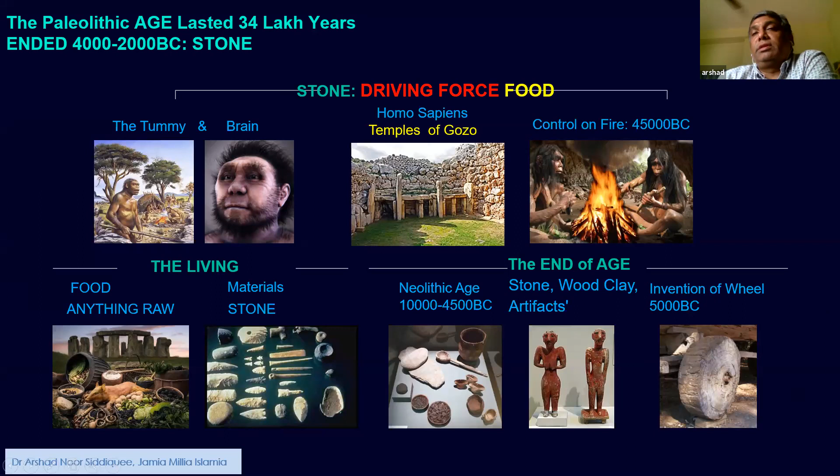Then came another revolution after the control of fire - there came another revolution, that is the wheel, which energizes the journey of development even today. This invention of the wheel dates back to 5,000 BC from now, that is 7,000 years from here.

Then came the era after the Stone Age, the first era of the Bronze Age. Because people learned that there are materials other than stone that can be developed by use of fire, they started searching for materials which could give way to metals, that is bronze, the only metal known to them.

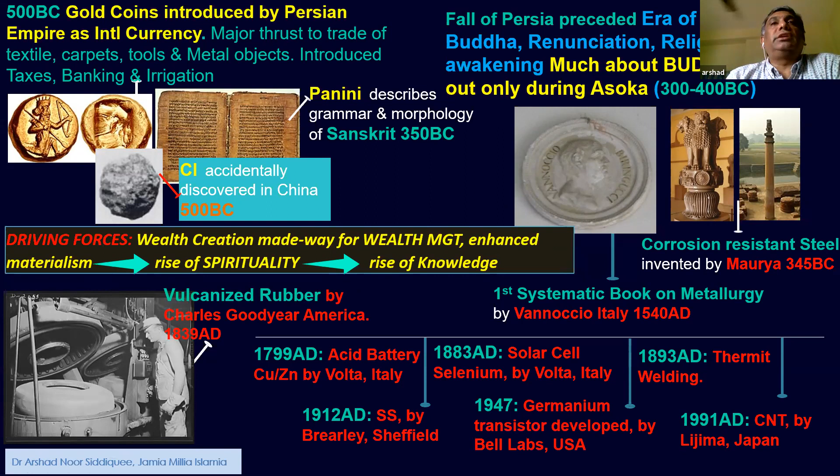Who is bigger? And the supremacy, actually, the quest for supremacy was actually the reason for the new development. What new can we do? Innovation, that's what we call it, innovation. The one who possesses the greatest knowledge will innovate better. And the very first innovation came in the form of materials.

I will show you some very interesting facts about the materials.

And because of their popularity in terms of being huge knowledge bearers, noble persons, Daedalus and Icarus were imprisoned by the empire, by the emperor. Then what did they do?

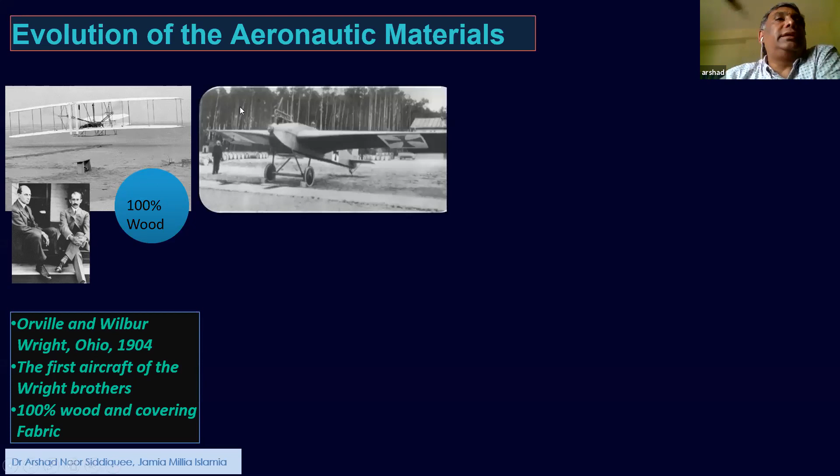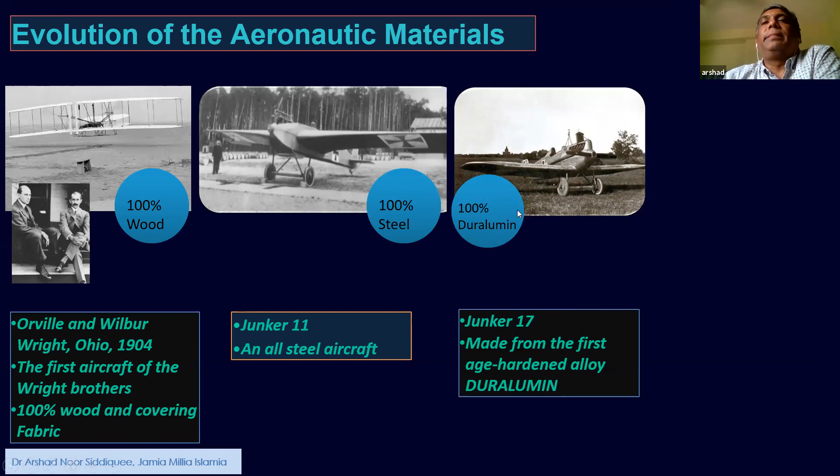Now the success of the flying object made by the Wright brothers led to a proper aircraft that was 100% steel - an all steel aircraft from Germany. Now, because steel has durability problems and weight problems, then came - by 1924 - the duralumin, the first age hardenable material. This is the all duralumin aircraft known as the Junker 17, and it is the first use of an age hardened material known as duralumin for aerospace applications.

Next is the all alloy material, 100% aluminum alloy. This is the evolution of the current day story of aircraft. So 100% aluminum alloy, different aluminum alloys, including age hardenable and non-age hardenable alloys. But as of today, for the last 10 years or so, composite material usage is increasing and aluminum usage is reducing.

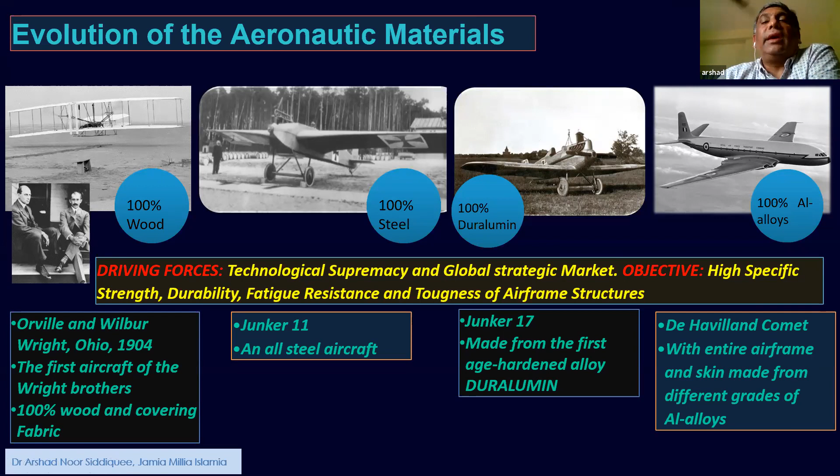Now there is a driving force: technological. We are living in the era of supremacy, and we continue to live in the era of supremacy. The driving force will always remain supremacy. This evolution actually has a reason with driving force - technological supremacy and global strategic market, wealth and technological supremacy. Objective: high specific strength, durability, fatigue resistance, and toughness of airframe structure. This is the main objective - why the material changed from wood to steel to duralumin and then to the sundry of aluminum alloys. So this is the story of aerospace, and the HEAs actually relate to aerospace.

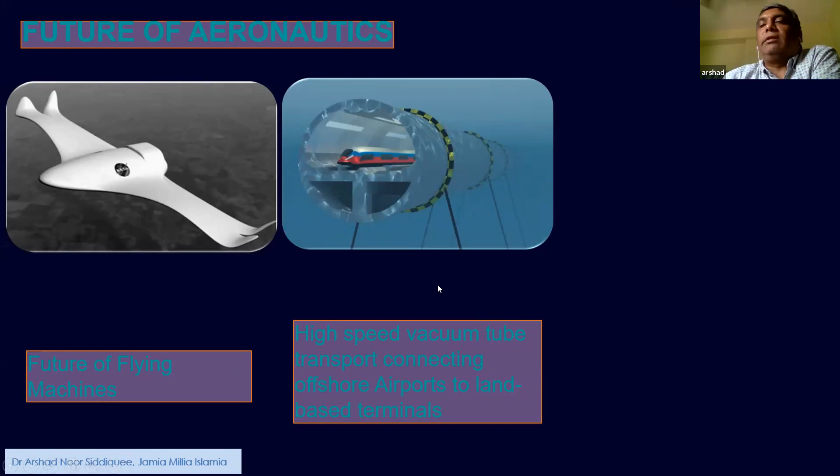Now, the future of aeronautics will look like this. The future flying machines, prototypes already tested, will look like this. Future means maybe around 10 years going forward from now, not very far. Here's what future flying machines will look like, and these are the feeder channels for the aircraft. So this is the multi-modal system: air to road, road to road, and water to road. These are all the vacuum tube transport that connects offshore airports to land-based terminals. And this actually looks like a typical airport of the future.

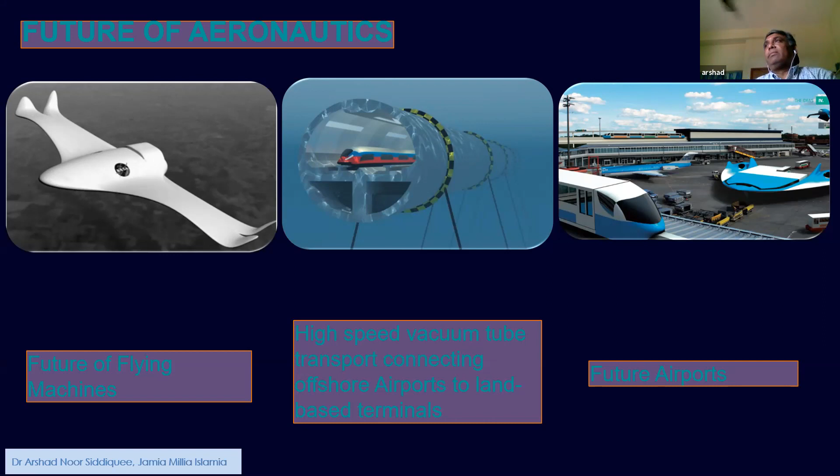Recently, China has already cordoned off 3 square kilometers of Shanghai airport, and built a maglev station with 10 lanes there. It was earlier cordoned off by the architectural structures, but now it is open. I must tell you that the maglev used to pass under a 12-lane highway, so they cast a 6-foot thick concrete roof as an underpass below the highway. This thick slab was cast at the roof of the underpass to avoid vibrations coming from the highway. This is what they are doing now.

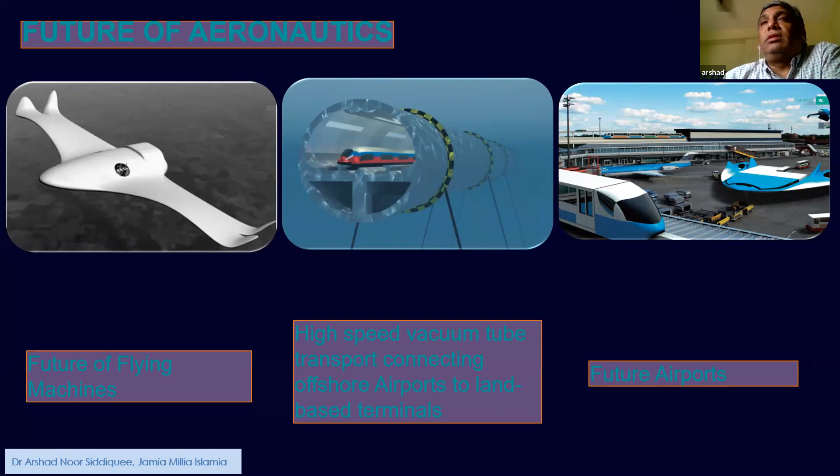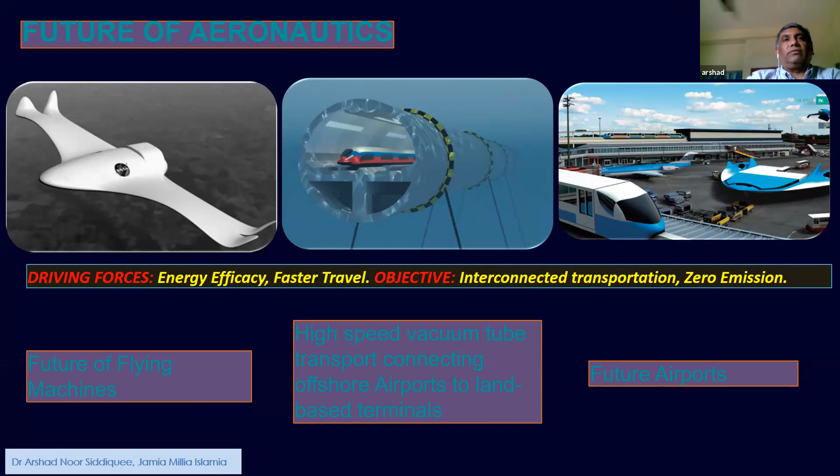So this looks like the future airport. Now, what is the driving force? Energy efficacy. The objectives have changed because we have put a lot of stress on the planet Earth. People started thinking of energy efficacy and time saving, because time is the most precious thing. The main driving forces are faster travel and energy efficacy, and the objective is interconnected transportation with zero emission.

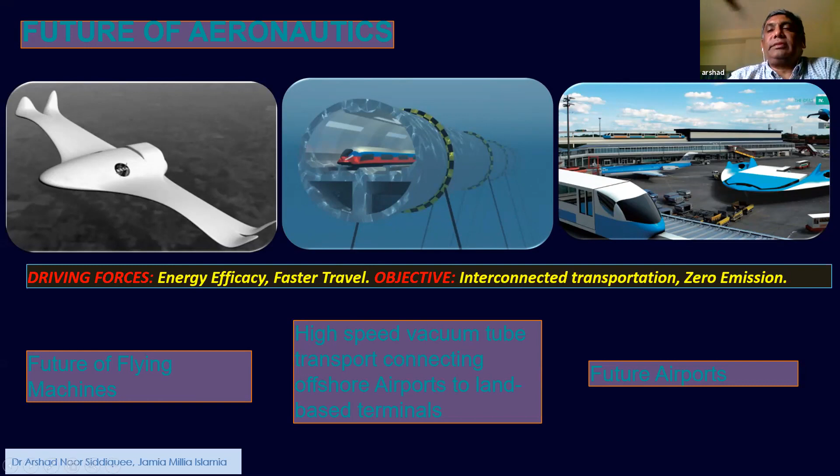These are the materials of the future. You see the rare earth materials and transition elements are going to be on the rise now - the early transition elements and the later transition elements on the periodic table. So this is the material projection for the future.

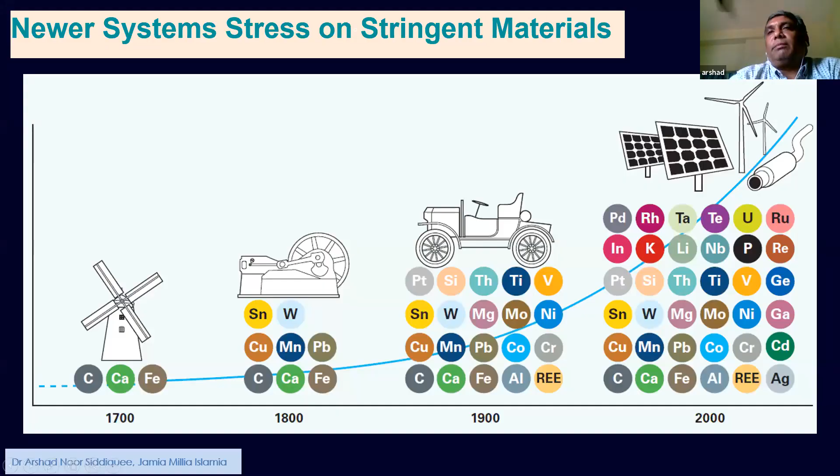The driving force for the next development will be powered by the sustainable development goals of the future, because the world body has come up with a lot of effort regarding greening the planet. They have set sustainable development goals that have to be complied with, especially by the transportation sector, because the greatest amount of material being consumed belongs to the transportation sector in terms of weight and volume.

So for reduction in CO2 emission, they have set deadlines per passenger per kilometer - a 75% reduction is the target, vis-a-vis today, 90% reduction in NOx, and noise emission reduction by 65%. Now you can see where you can actually have your own share of research. You can think of working on damping materials, damping of noise and vibrations - those in design - and those in thermal side can think of reducing NOx and COx.

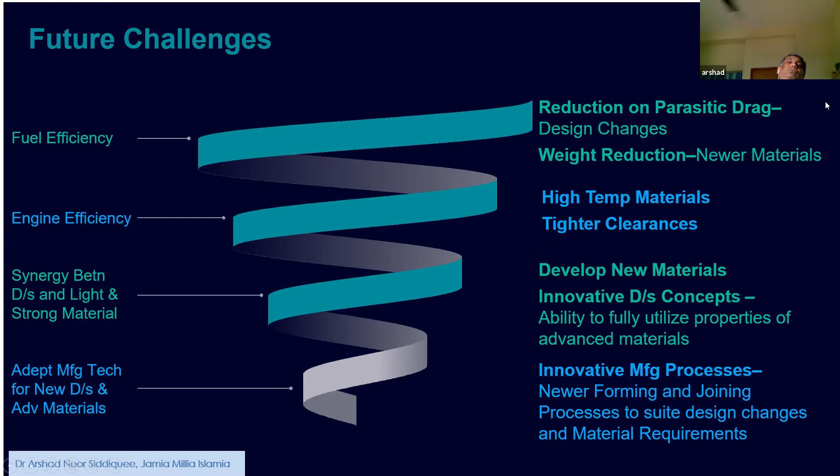Now, the main objective for the superstructure is the weight reduction, and the weight reduction actually directly relates to the specific strength of material.

Typically, the conventional strengthening comes with these aspects: refinement strengthening, dictated by Hall-Petch effect, and strengthening by cold work, which is facilitated by enhancement of dislocation density. If you look at the fully annealed material, it will have 10 to the power 8 dislocation density, and when you give it heavy cold work, it will increase the dislocation density to 10 to the power 12. So this is the order of dislocation density that changes as a result of cold work. So cold work actually enhances dislocation density, which in turn enhances the strength of material.

The first one is refinement strengthening, grain refinement, through the Hall-Petch relationship. Strengthening by cold work is through dislocation density. Then solid solution strengthening, that is resistance by lattice distortion and pinning effect. The solid solute atom that goes into the alloy will be either larger or smaller than the parent or solvent atom. If it is so small that it can be housed in the interstice, then it will be the interstitial solid solution. So in all three possible cases, the distortion in lattice will actually affect the dislocation movement, and hence it will strengthen.

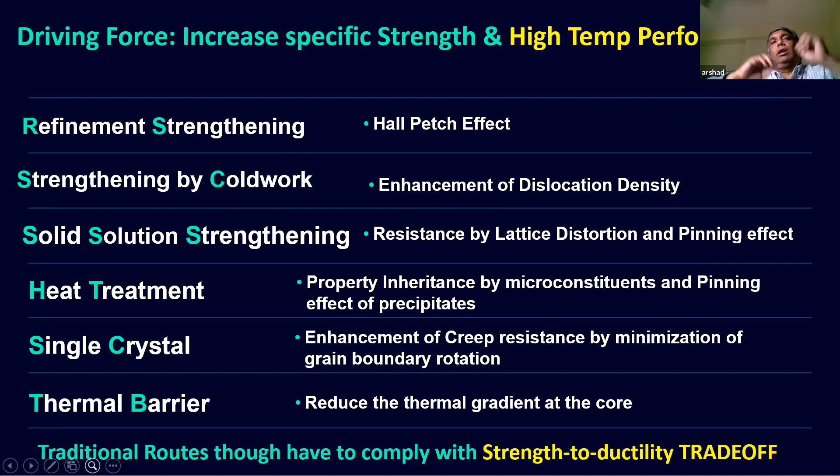But the traditional route has to comply with the strength-ductility trade-off that puts a limit beyond which we cannot go any further. So this is what I spoke about in my previous slide.

The superalloys, coupled with single crystal casting. The single crystal casting was facilitated by directional solidification. Turbine blades were cast, most commonly by investment casting, and after investment casting, directional solidification evolved into single crystal casting.

This is how Ni-based superalloys were developed from 1940 to 2010. I say 2010 because, as I told you in the beginning, the high entropy alloy is a phenomenon of the last decade, 2011 onwards. The next phase of evolution of engine materials will not come from superalloys, but from high entropy alloys.

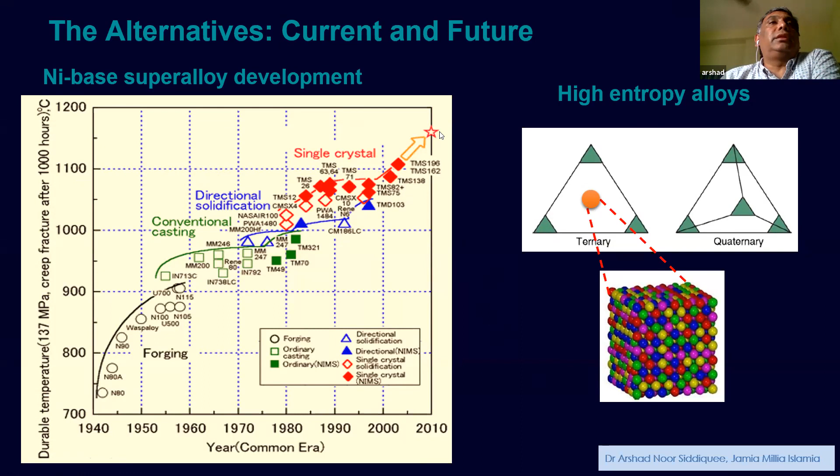What are high entropy alloys? I will come to that in the next slide. What is novel about them? I told you in the beginning that conventional alloys deal with the traditional concept of enthalpy, whereas high entropy alloys deal with the entropy of mixing.

The requirement is a minimum of 5, up to a maximum of 13 different elements known to be mixed in order to make high entropy alloys. But this 13 has no finite limit, and hence we have an infinite workspace - an infinite number of new high entropy alloys can be developed. So the space is very vast and open.

In conventional materials, there has to be a solvent and solutes. But in the case of high entropy alloys, the principal element, that is the solvent element, can be any prominent element - there is no limit. So there's high entropy of mixing, a simple solid solution phase, and lattice distortion.

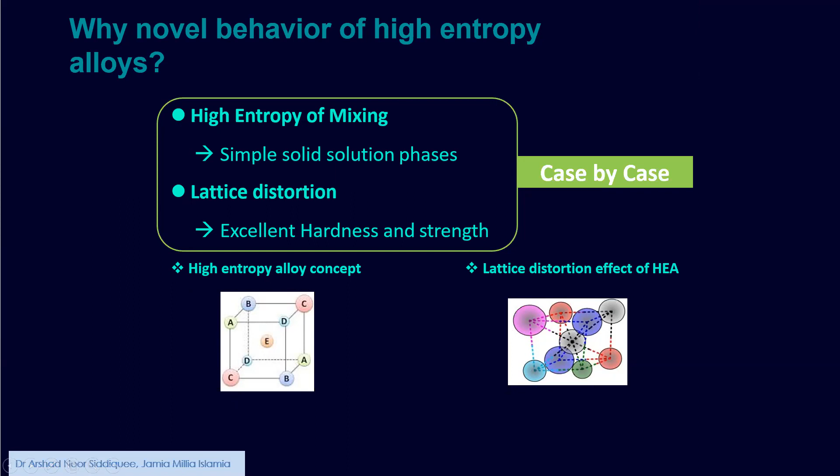Future aeronautic materials lie not only in HEAs but also in graphene. Graphene is interestingly represented in that it can actually...

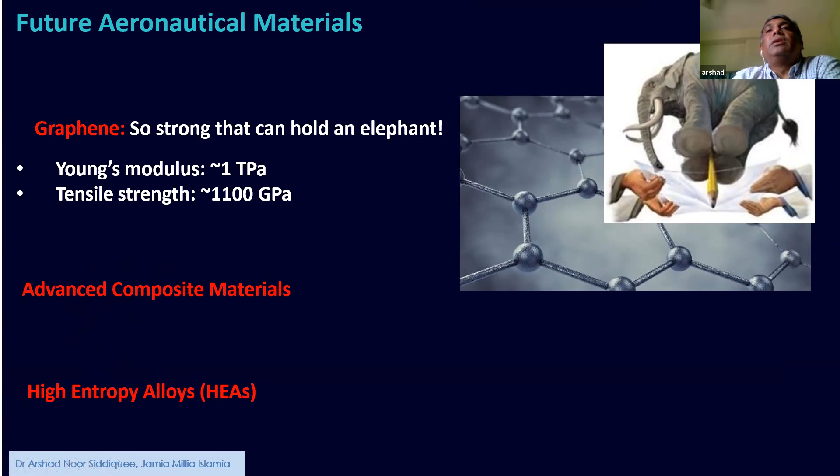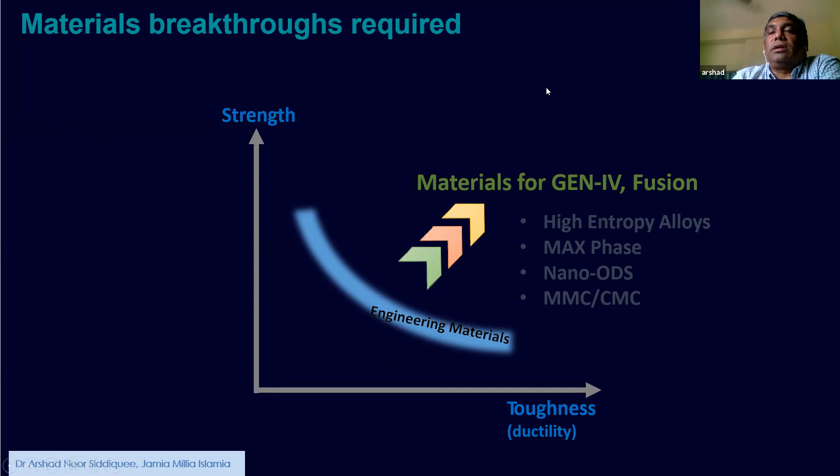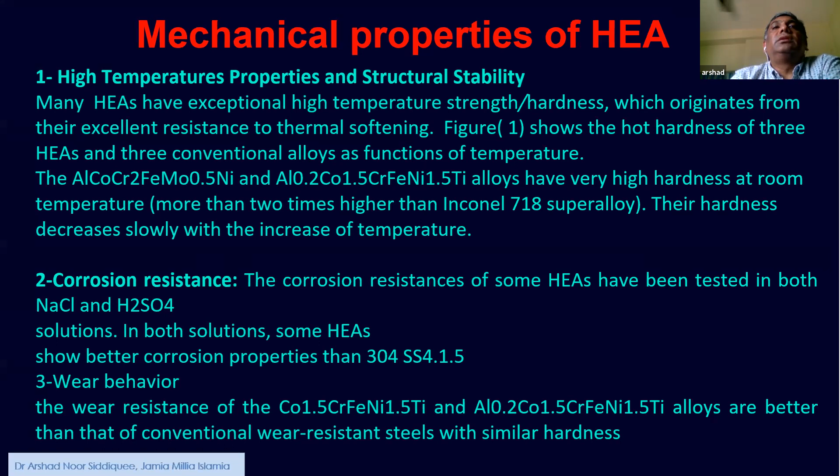So all properties simultaneously get enhanced, and the traditional trade-off between strength and other properties does not exist in case of high entropy alloys. And of course, as temperature rises, the strength and other properties of traditional materials reduce very sharply, whereas in case of the high entropy alloys, the performance remains steady.

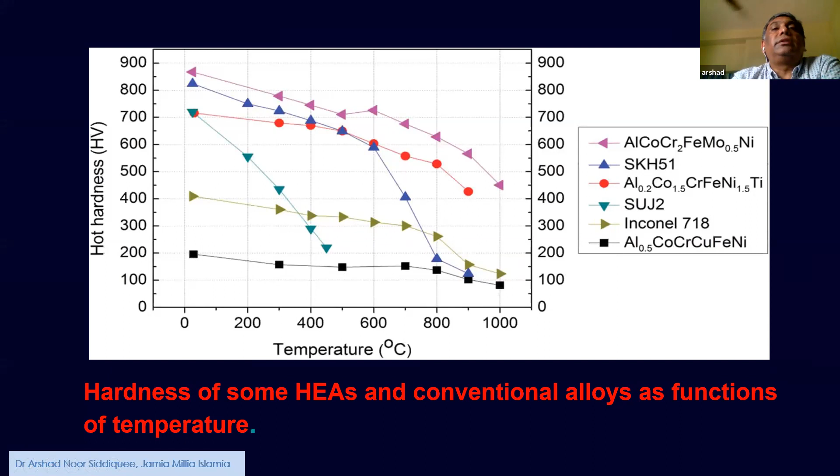You can see these are all the different types of high entropy alloys with different colors of geometric shapes, and you can see the hot hardness at temperature 1000 degrees Celsius. The material was heated and its strength was measured in hot state, and you will see that it maintains usually a steady hot strength. So this is one of the plots that depicts the relationship of hardness with temperature.

And again, this is the depiction of Young's modulus and specific strength of different high entropy alloys. This is actually reference.

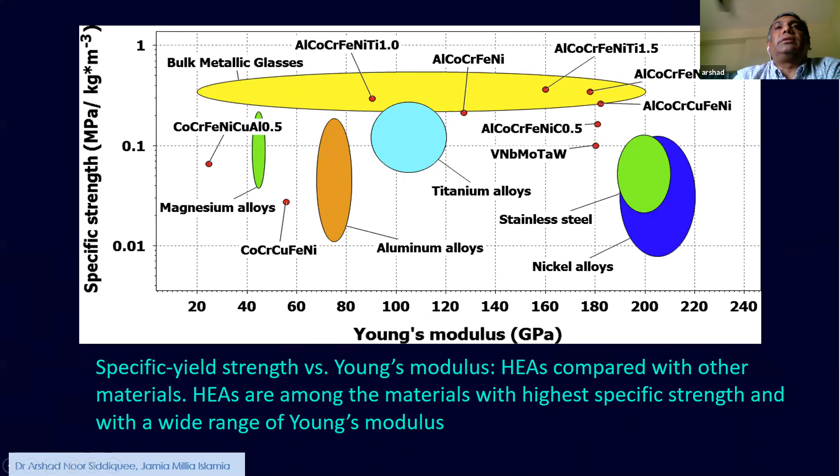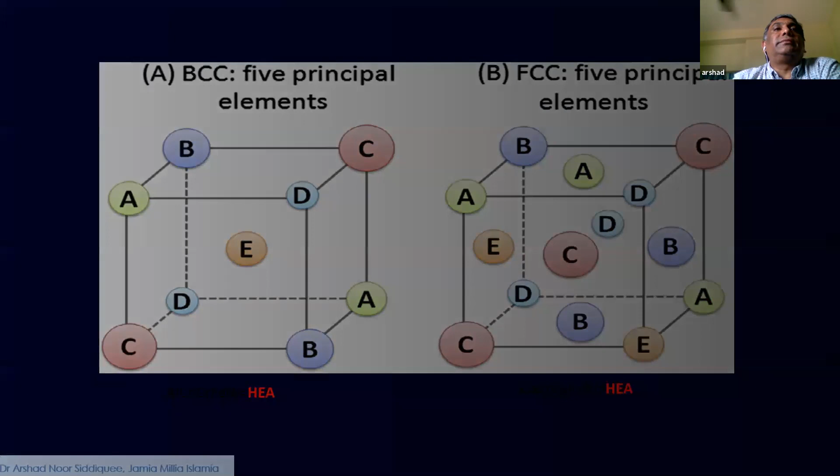So what are high entropy alloys? I think I have to skip this slide, I already showed you. High entropy alloys, you can see here, have a minimum of 4 to 5 components, and there is no limit for the maximum number of components, but minimum 4 to 5 components. The alloy can generate a uniform structure, either FCC, BCC, or HCP.

You can see the example of cobalt, chromium, copper, Fe and Ni as the main components of the HEAs, wherein this particular alloy has a FCC phase, whereas material such as Fe has a BCC phase and chromium has a BCC phase, whereas nickel and copper have FCC phase. In case of Fe, when the temperature rises beyond 912, it changes from BCC to FCC, and then again around 1400, it changes from FCC to BCC, but the basic structure remains BCC.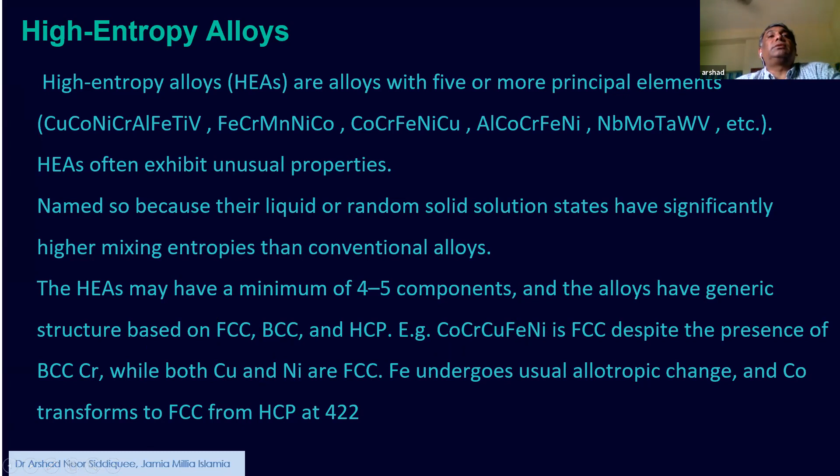So there are 3 types of HEAs: BCC HEAs, FCC HEAs, and HCP HEAs. Out of these 3 categories of HEAs, the FCC HEAs possess the highest magnitude of creep resistance. So this is what I just wish to show you - this is the structural schematic representation of atomic arrangement in unit cell.

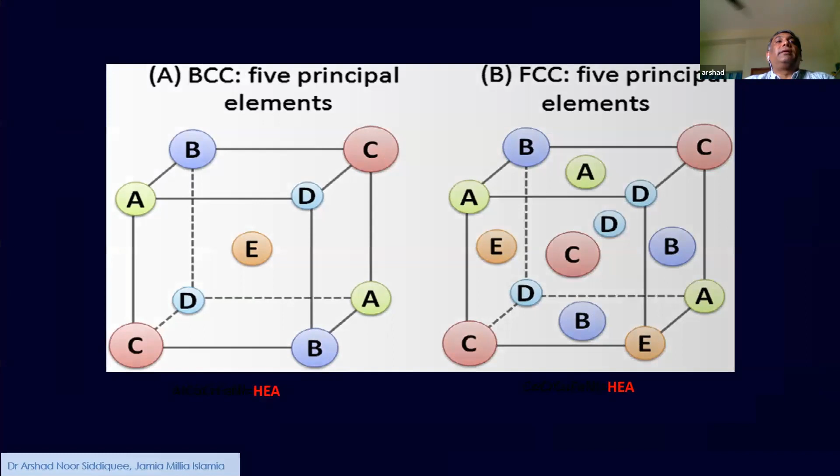Now thermodynamically, this is the classic equation which gives the free energy, wherein the enthalpy remains the major factor for conventional alloy development, whereas in case of the high entropy alloy, the delta S mix is the main factor which actually comes into play. In order for the energy to be at global minimum, we can play with the right hand side of this equation - delta H should be low and delta S should also be high.

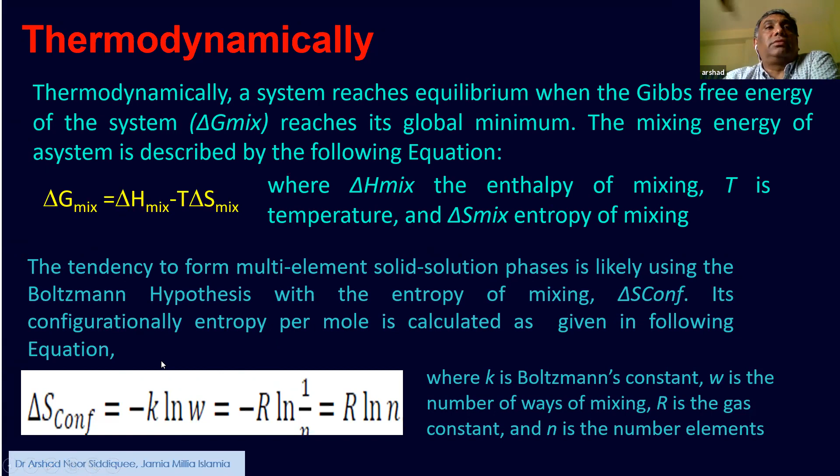So this is how we actually calculate. We can also calculate the Gibbs free energy and then identify which particular alloy is most likely to be formed. That is what we do in FSP - we actually calculate enthalpy and entropy, and then utilize this equation to calculate the fraction of which particular HEA has been formed. So this is an equation. I think the time is about to finish, already finished, so I have to stop here.

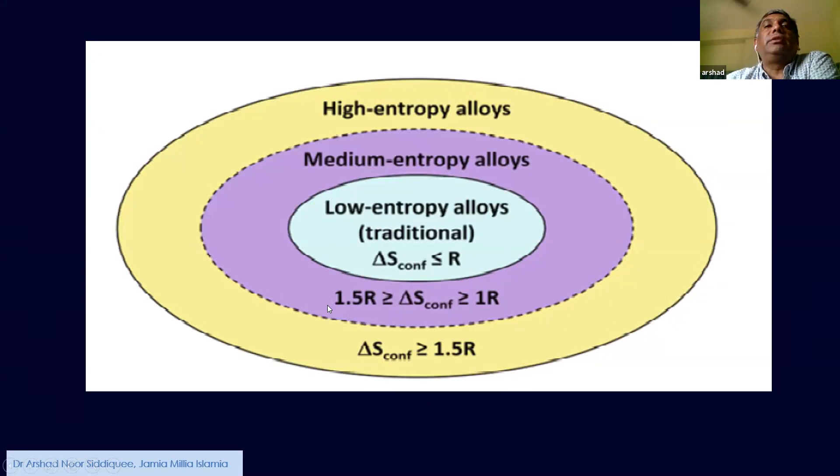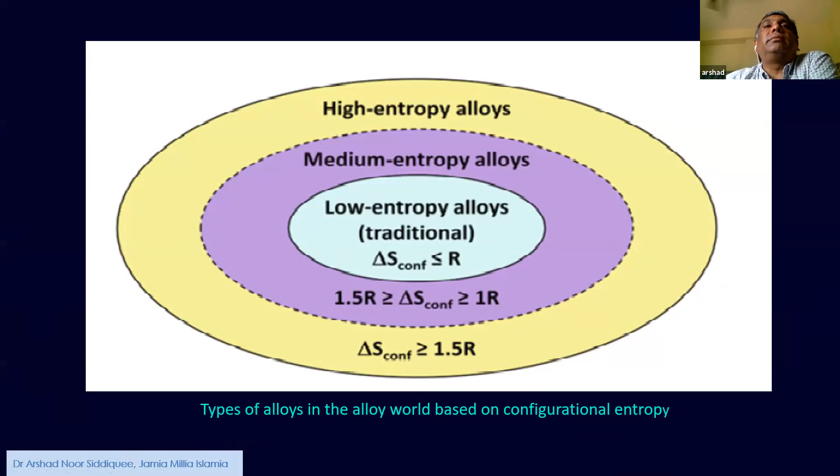There are 3 types of high entropy alloys: low entropy alloy, medium entropy alloy, and high entropy alloy. Basic categorization will be based on the delta S configuration. If the delta S configuration is greater than 1.5, it is a high entropy alloy. Between 1.5 and 1, it is medium, and if less than 1, it is a low entropy alloy. The common stainless steel is again a low entropy alloy.

So our 18-8 stainless steel - this is what is the entropy of some of the alloys which are categorized as low entropy, and this is the medium entropy alloys. These are all the common materials. You see that Ni based superalloys are medium entropy alloys, whereas the HEAs are high entropy alloys, so performance is better.

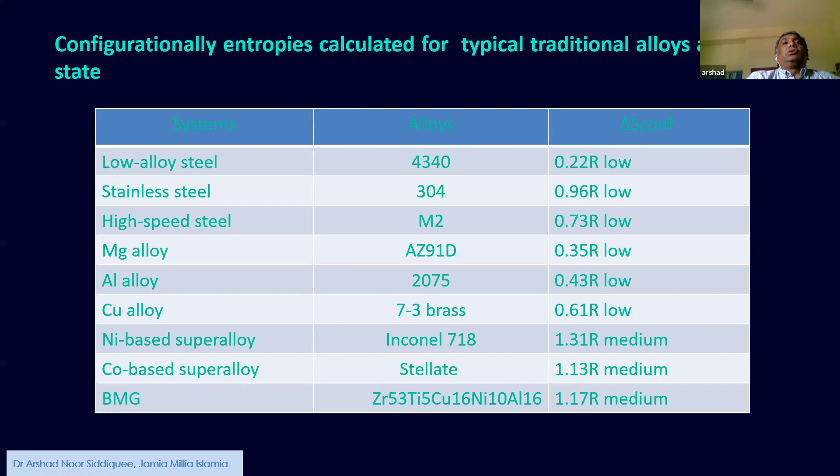Infinite, you can develop an infinite number of new materials. So one of the most common ways of manufacturing is spark plasma sintering.

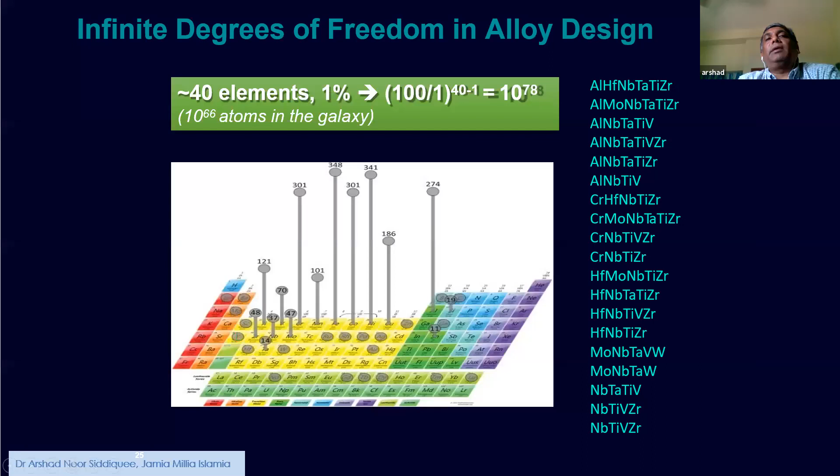So there are two types of spark plasma sintering. First of all is the solid state, next one is the fusion state. In the solid state, the main heat energy dissipation is through the interfacial resistance, whereas in case of the fusion based type, plasma is formed between the grains.

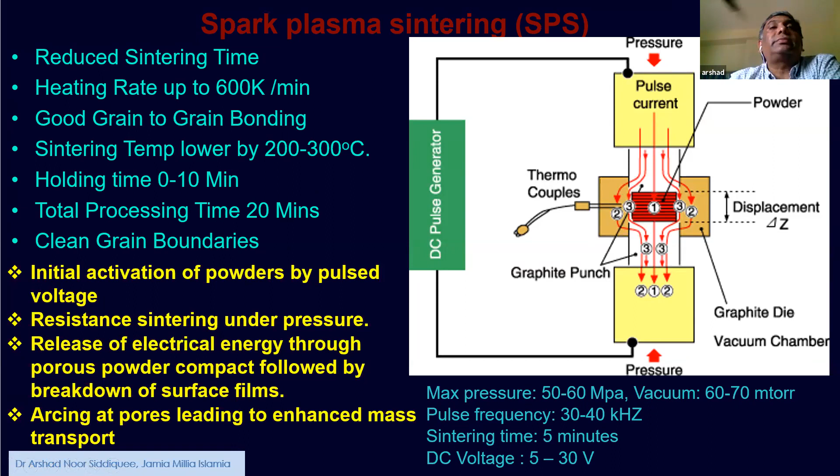The other route that is available is the powder metallurgy route. In case of spark plasma sintering, the heating and pressing is simultaneous, whereas in case of powder metallurgy, it is sequential.

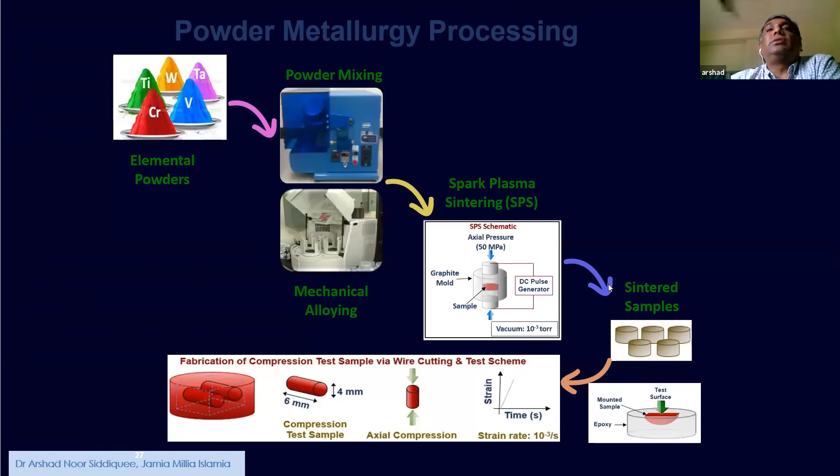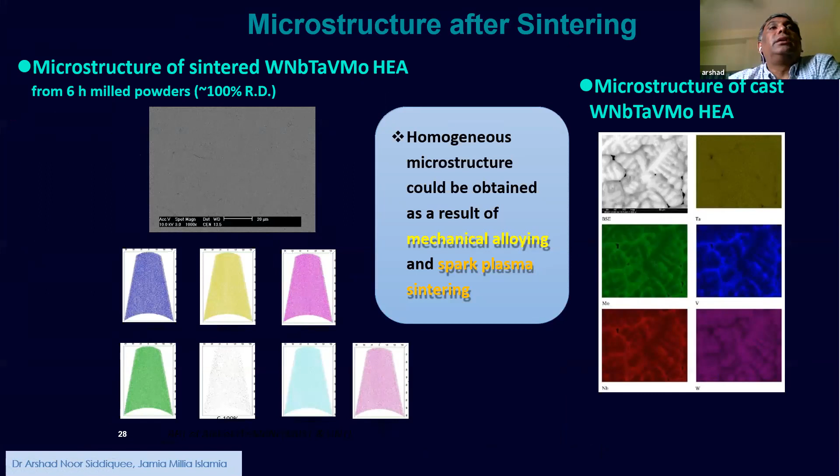So this is some of the microstructures that have been obtained from the high entropy alloys. These are the various steps involved in the development of the high entropy alloy. First, we prepare the high entropy alloy, then we anneal it several times. Annealing is required sometimes 3-4 times in order to make it homogeneous, and then we characterize it.

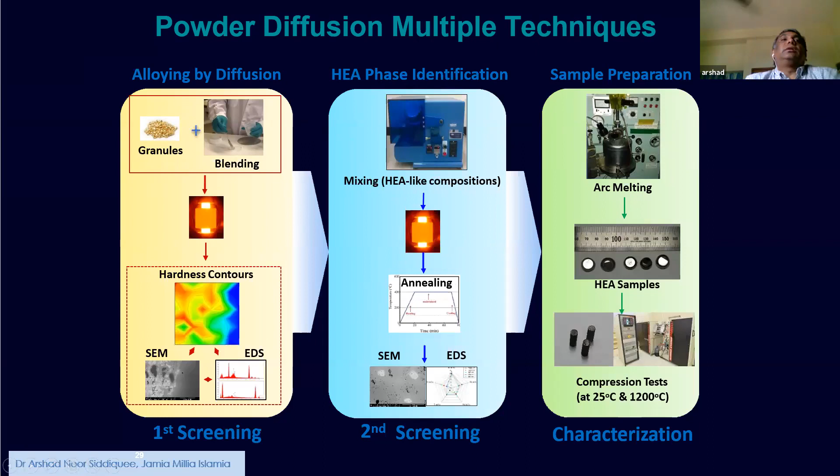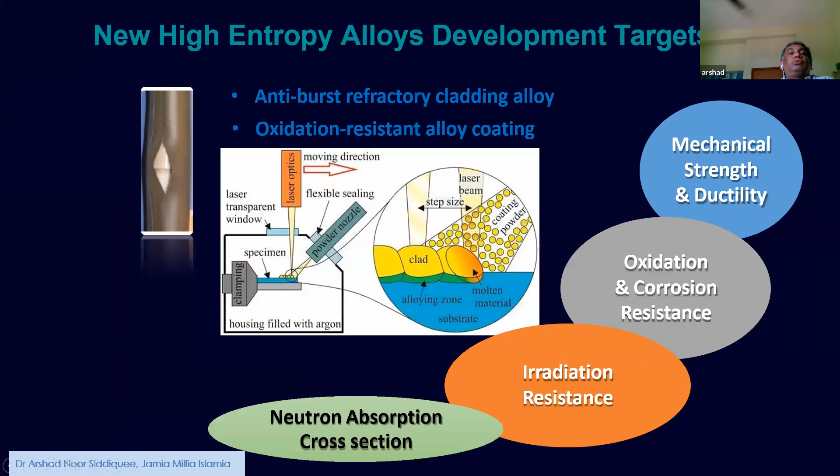The other technique for this is coating. HE coating is also employed, and HE coating is done by powder injection as well as sintering by laser. I wanted to show you how we developed the HEA by FSP, but I believe time is not there, so I have to finish in between. Should you have any questions, you are most welcome, otherwise I have finished.

Good morning, sir. Good morning. Sir, it was very interesting - rather this is the modern work, what you did, instead of that ancient one.

But I have some doubt, not doubt - I want to clarify some facts. During the Chanakya era, some work on converting one metal to other, like preparation of gold from copper, was going on. Is there your voice? Hello? It's disturbed actually, I can't hear completely. Okay, I'll repeat again, sir - during the era of Chanakya, it is not so, sir? Yeah, during Chanakya's era, the manufacture of gold from other metals, that kind of work was going on.

Chemical modification of the metals. No, actually I understand that. See, the thing is that I have shown only those material developments for which the archaeological evidences were found by me. I researched a lot, but only included those in my slide, like the iron pillar - that is very clear. So many more evidences have yet to come; maybe carbon dating and other things are going on at the moment, so in the near future maybe some new things will come up. That's why I did not include them. There are many, you are correct, but I could not find citable references so that I could include in my slide. That's why I escaped it. Okay, so that is there. Yeah.